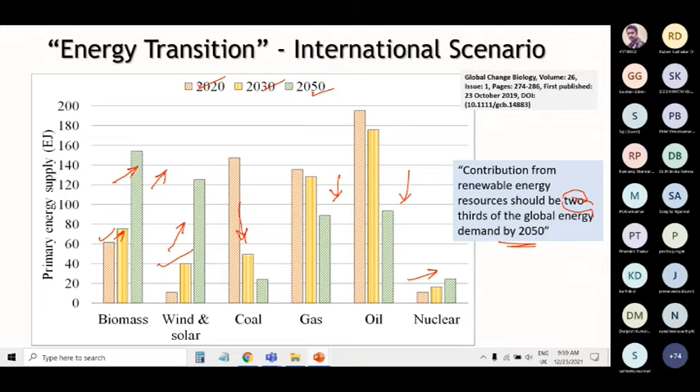Okay. Take the biomass. If you take the biomass supply chain, we need to hope for a feedstock, because the applications are different and the properties of biomasses are different. You would have seen that Dr. Lawrence has taken a very good lecture on how the characterization is done, what is the need for studying a biomass, how biomasses have different characteristics and their performance. All those things you have seen. Therefore, the feedstock supply is very essential.

And the conversion of biomass to fuel. See, the feedstock should be selected properly and the conversion system should be designed well, then only we get a biofuel. If you take biomass, normally we concentrate more on the biofuel. It may be a liquid fuel, solid fuel or gaseous fuel, whatever it may be. So biofuel has to be prepared, then it can be used for energy, any end usage, either a thermal application or power generation.

Among the biofuels, if you take the gaseous fuel, it has a lot of flexibility. You can use it for any thermal application. You can use it for any power generation without much conversion. If you want to develop some new energy-based system in a rural area, if the local biomass can be used as a gaseous fuel, the complications for the system will be reduced. If you go with the biomass directly, a lot of issues will come, operational issues, everything.

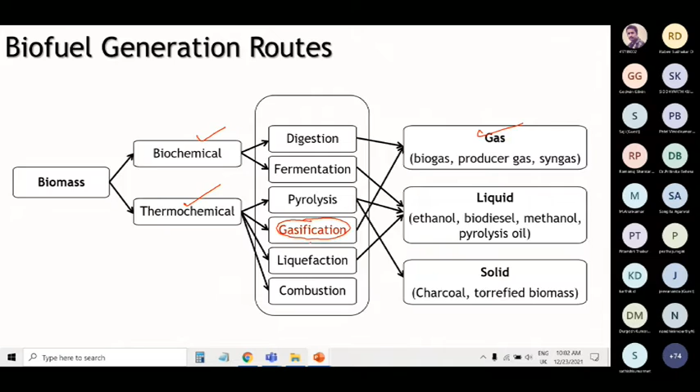You have seen many types of conversion systems. I'm not going to deal much on that. My focus is toward the gasification. If you take the gasification, some basic terms are available. Maybe most of you know what is gasification. It's a partial combustion of biomass with an oxidation medium to form combustible and non-combustible gases.

Actually, the main thing is we are heating the biomass to a particular temperature, either burning some quantity of the biomass or using external heat. We heat the biomass to a particular temperature, and we are trying to make some endothermic reactions. The gasification reactions are endothermic reactions, so those reactions need heat. So if we apply heat in the right temperature and the right quantity, we can get gases like CO, H2, CH4 and so on. So that is the main aim of this gasification.

Mainly we are using air or steam, sometimes a combination of air and steam. Many approaches are there. I'm not going to deal more on those things. Our focus is mainly towards the air. The air is available everywhere. As I said, our aim is to take this technology to the rural area. In the rural area, we cannot work with complicated things. We have to work with simple things, available things, right? That's the reason we have taken air as our gasification medium.

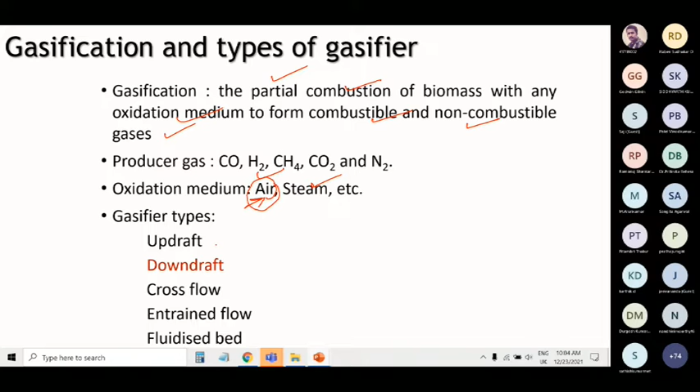If you take the gasifiers, there are different types of gasifiers available. First of all, let me say a few words, just to refresh you, about what is a gasifier. A gasifier is a chamber where we are keeping the biomass. We are drying the biomass, and we are heating it, and some pyrolysis activity is going on. The heat is supplied by this combustion. Some quantity of biomass is burned with air, and that is used for this pyrolysis, then drying.

Finally, after that, we are going for a reduction. This zone is the one which is converting the char and other things to a gaseous fuel. So this is the basic operation. We are applying temperature by a partial combustion. We are doing all the thermochemical reactions inside. Finally, we are getting a gas outlet. So this is the medium where we are giving fuel.

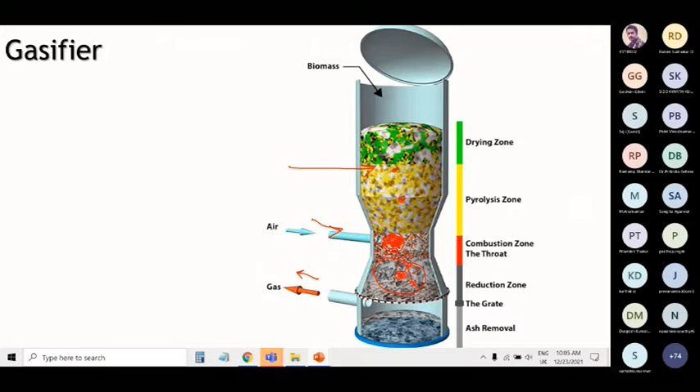Depending on the way the biomass is given to the system, or on the reduction zone, we are classifying the biomass gasifier into different types. This is an updraft gasifier; the reduction zone is normally above the combustion zone. In the downdraft gasifier, the reduction zone is below the combustion zone, and cross flow means it is at the side of the combustion zone. These things are based on the combustion zone.

Depending on the type of biomass, we have to deal in a different way to have a good flow. Our main aim is to get a good flow and allow enough time for the biomass for the thermochemical reaction, and at the same time collect the ash and get a good quality producer gas without much tar and other things. Then sometimes we are using the fluidized bed and the entrained flow. Our focus is mainly on the downdraft gasifier. As far as the Indian situation is concerned, these downdraft gasifiers are available and well suited to our requirements. That is the reason it has been selected.

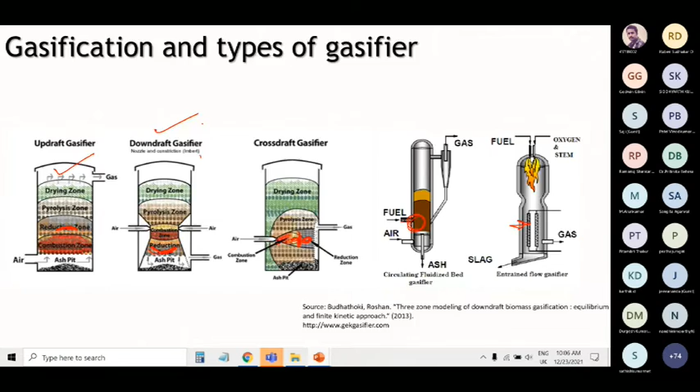So in this downdraft gasifier, as I discussed before, the biomass is fed from the top. It may be continuous or batch, we will see to that. The top zone is a drying zone, then pyrolysis, combustion and reduction. Actually, the grate is there. This is the one which is controlling the size of the biomass. If you want to use a big size or small size biomass, accordingly we have to have a different grate size.

Then first we fill it. We are burning it partially by supplying a limited quantity of air. Normally we call it the equivalence ratio. We won't send the stoichiometric air. We control the air so that the required amount of heat is produced. So this heat can support the endothermic reactions in the reduction zone, and the gas leaves.

A lot of other factors are there to control the zone temperature, control the ash and other things. Okay, that we will see in the coming slides. So this is what we are going to do.

So our gasifier, the downdraft gasifier, is a very simple device because any biomass can easily be charged or loaded in the system, and you can easily remove the ash at the bottom. We can control the air flow rate, we can control the moisture, so many things can be controlled. This is a simple device, there is no complicated operation. That's the reason a biomass gasifier is preferred for rural applications.

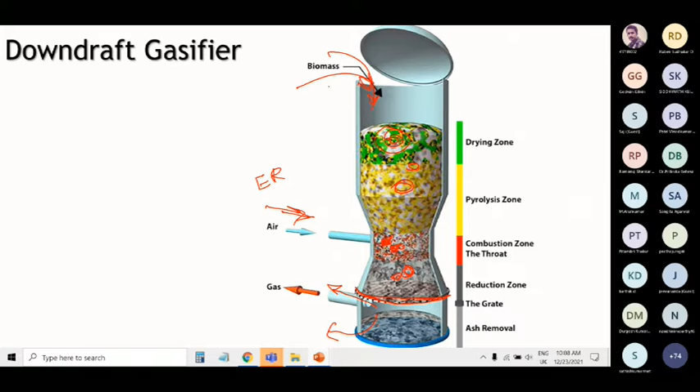Already some gasifiers are also available, and some of the features they have. I'm giving you some more basic things about the gasifier, why we have selected this type of gasifier in our research to implement the rural biomasses. The downdraft gasifier, throat type and open core type.

Actually, there is a throat section available normally in the gasifier to increase the velocity of the air if it is forced convection. We pump air into the system, and it should control the flow. For that we have a throat. If you use powdery biomasses, especially low particle size biomasses like rice husk, groundnut shell or coir pith, the throat section is the place where the flow chokes. So we cannot get a good gasification. A lot of problems are there.

That's the reason we have open core. The throat is not available. The throat is in the combustion zone, where some arrangement is there, but below the combustion zone the throat section is completely avoided. Even with the downdraft gasifier it is possible. We can change. And with the recently available gasifiers, we can go for both modes, with solid big size particles as well as small size particles, and we can work for hot gas and cold gas.

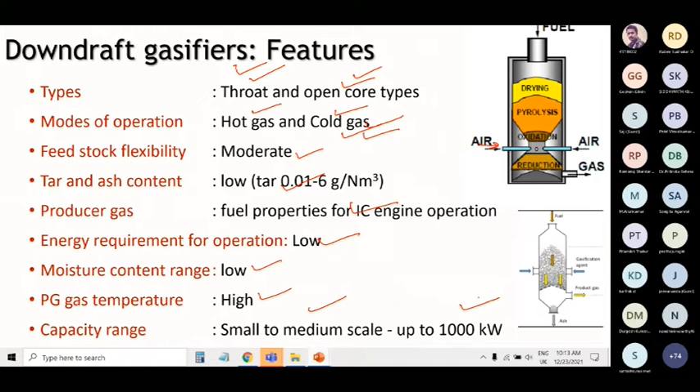Maybe 20 kilowatt thermal you can get, or 1000 kilowatt thermal we can get. It can be fabricated with good efficiency. Okay, we can fabricate the system for small power as well as large power with a good efficiency.

When we take the operation parameters, we have to control some parameters so that we can play a major role for the energy efficiency, proper gasification, overcoming the flow issues, end-use application, then quality of the gasification. Okay, so all these things are the major roles, right? For that, we have to control the input parameters. First of all, to make the system perform well, the input parameters must be controlled well.

Input parameters in the sense, the feedstock. So this is our main focus. So feedstock should be properly controlled. Many characteristics are there for the feedstock. It should match as per the design requirement of the gasifier, or we have to suitably modify the gasifier for meeting the requirement.

Then moisture. Moisture plays a major role in the performance of a downdraft gasifier, especially choking or other things, tar formation, all these things. So we should study and control it. Gasification medium, the inlet air, maybe you can say air, okay, but the temperature of the inlet air plays a major role. The humidity of the inlet air plays a major role. So all these things are to be controlled.

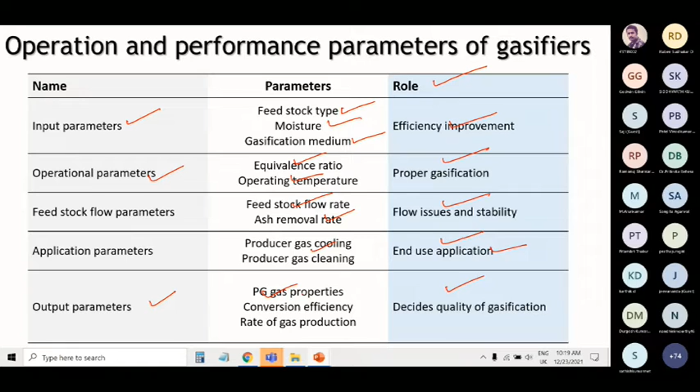For instance, we are trying to use this gasifier for paddy parboiling, where they are directly using rice husk. Instead, if you go for this gasifier, we found a lot of savings in many areas. That's why we should know the parameters and the characteristics of the feedstock well. If you know those things, we can take it to the required application and our expectation can be fulfilled.

Now I want to discuss some performance parameters and methods to improve them. We can control the feedstock properties, and we can do some modification in the design - change the position of the nozzle, change the angle of the nozzle, increase or decrease the various zone sizes, change the dimensions of the gasifier. If it is a small change with techno-economic viability, we can ask the manufacturers to do the same and get it.

And we can use catalysts - many people tried with catalysts, which has its own advantages and disadvantages. The gasification medium can be controlled, maybe using preheating. Suppose we have low temperature waste heat available, we can use it for preheating the gasification medium and control its quality. Then we can improve things. The other method is co-gasification, which means mixing of biomasses.

The main problem we face today in rural application is, suppose we design a gasifier for rice husk - it is available for one particular season, and once it is over it will not be available. The gasifier becomes idle, or it has to buy fuel from a long distance, which will not be cost effective.

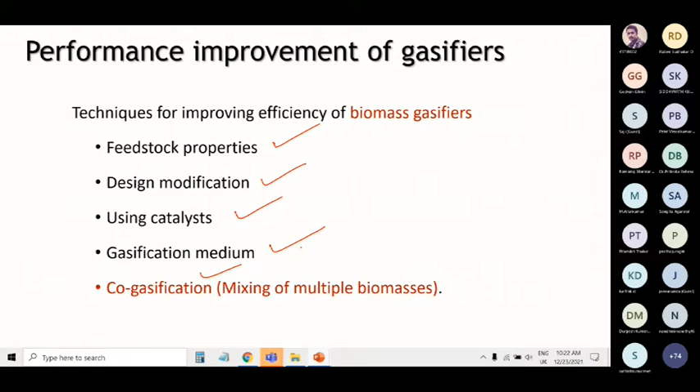The selection of feedstock is a very essential step. We have to study the availability and the properties. Availability we studied by making surveys in different regions, discussing with people, and based on the small industries available, we found the availability of different biomasses we tried. Then the properties and characterization are very important.

It has to be studied. Then only we know its carbon content, ash content, whether it is manageable - all those things we get an idea about. Then handling, how to collect. Some biomasses are expensive to collect, some have expensive transportation costs because these are all bulk density components. If you take rice husk in a big sack, it may be 10 or 15 kg. So we have to collect, store, transport - all those issues are there, and we have to study them.

Then cost. Many biomasses are available, but sometimes they may not be cost effective. All these factors are to be studied.

And on the point of characterization, I am putting a table here. It shows that some biomasses have high ash content. Sometimes previous reports say 14%, 20%, 25%, let it be. What I'd like to say is, depending on the location and the type of plant, the characterization properties will vary - the carbon content, hydrogen content, oxygen content, as well as ash content, all these vary based on the place.

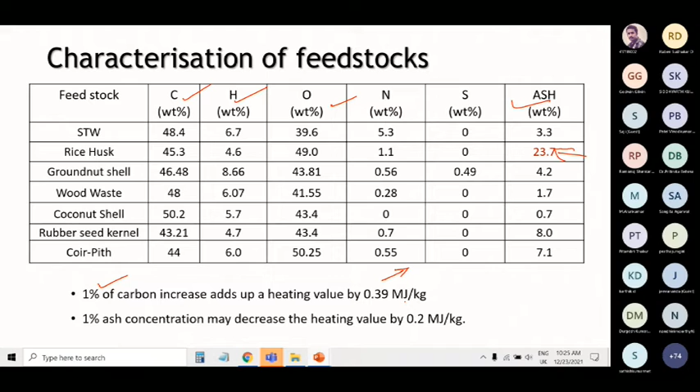A crude analysis says that if the carbon percentage is increased by 1, the heating value can increase by 0.39 megajoules per kg - this is some crude rule. So if the ash content is reduced, it's good; if the carbon content is increased, it's good. So we get some idea. Maybe detailed characterization may be taken, but for a basic application, we need the minimum study and get some output regarding the carbon content as well as ash content.

If you go for co-gasification, it means mixing of 2 or 3 biomasses. One is called primary biomass, the other is taken as secondary biomass. We are mixing them.

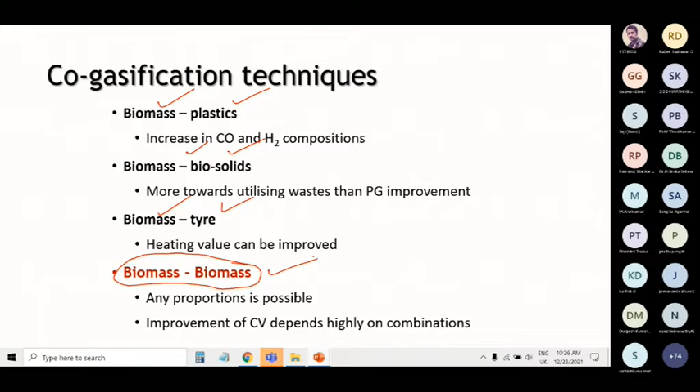If you take co-gasification, there are many techniques available. Biomass and plastics - people do it to improve the CO or H2. Biomass and biosolids - in some places, biosolids can be converted to biogas with proper mixing. Biomass and tire. But all these things may not be possible in rural areas. In rural areas, the only possible thing is biomass - we have different types of biomasses, and we can mix all of those. That is the reason these biomass combinations were selected for our studies.

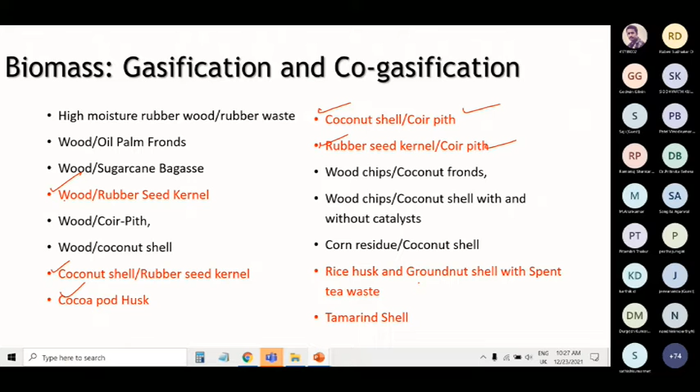If you take biomass gasification, many studies are available - people tried different combinations, different mixing ratios. But we took what is given in red here, and we tried all these in our gasifiers and checked how the mixing performed, whether it gave a good yield or not. For instance, when we tried coir pith and coconut shell, it was not attractive. Even rubber seed with coir pith was not attractive. Even though coir pith has a high calorific value as a solid fuel - good carbon content, everything - when we take it to the gasifier and mix it, it doesn't give a good result. We cannot go very deep into the technical aspects, but from a practical point of view, it was not doing well. But some bio waste, when added, gave us a very good output. That's the reason we took all those things for our studies.

These are the biomasses used. And for our experimental study, which I will explain in detail later, we used 2 gasifiers. This gasifier is a 50 kilowatt thermal gasifier, used for thermal applications. I will discuss all the details in the coming slides.

It is mainly used for thermal application. We have to load around 40 to 50 kg of biomass at a time, seal it, switch on the blower, and based on proper air supply and ignition, it starts working. Maybe after 25 minutes we get the producer gas, and it will run for 4 to 5 hours continuously.

Then we have to reload it. We have to remove it and wait maybe 24 hours to cool down. Then we should go for the next loading. It cannot be loaded continuously.

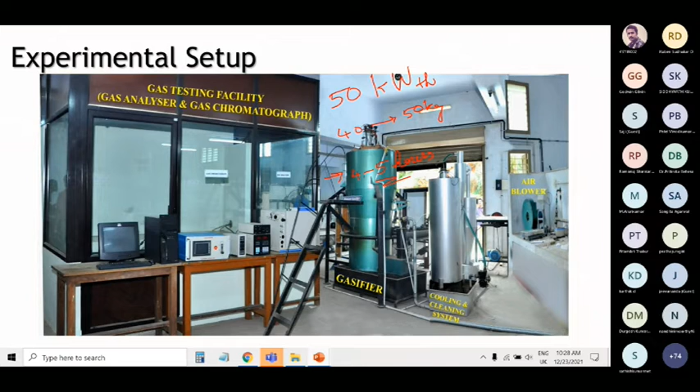It's one kind of gasifier. It is commonly available, mainly used in crematoriums. I think it is available, and some suppliers are making it there too.

Mainly it is used directly. These are the components, I will explain later. This is a sectional view of the gasifier, made just for our studies. Here the biomass is stored.

We have different sensors to measure the temperature. These are the air supply system nozzles, and the grate is here. The producer gas comes out. So this is a downdraft gasifier.

The air is passed through this way, and the combustion takes place here. We are already making a throat section here, and with the help of that it performs the gasification process.

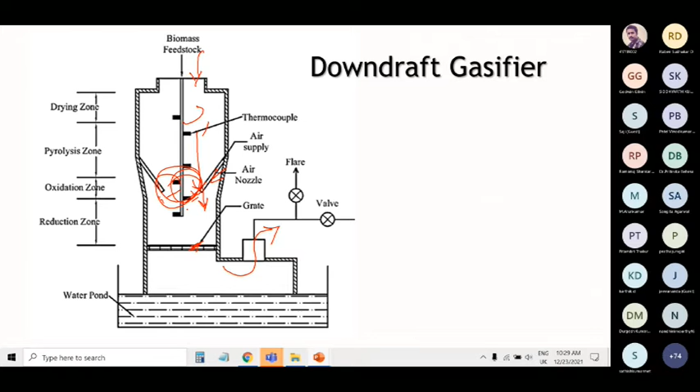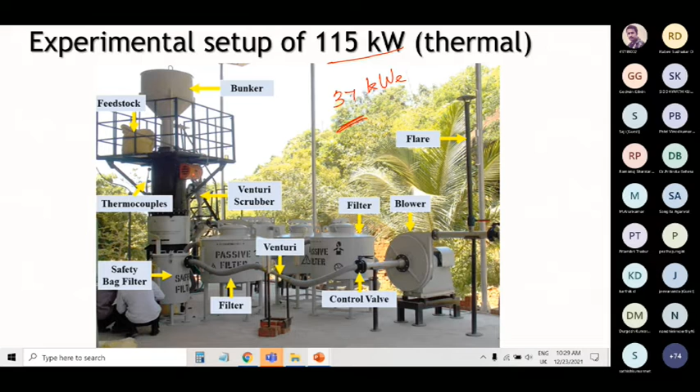This is another view of the gasifier. It can be operated continuously. It has a filtering arrangement and can work in direct thermal mode. It can be used for engines and for any applications.

We have all the control mechanisms here. We can use hot gas mode, cold gas mode, minimum filtering, maximum filtering - all these things can be done. I will discuss these more when covering the experimental studies.

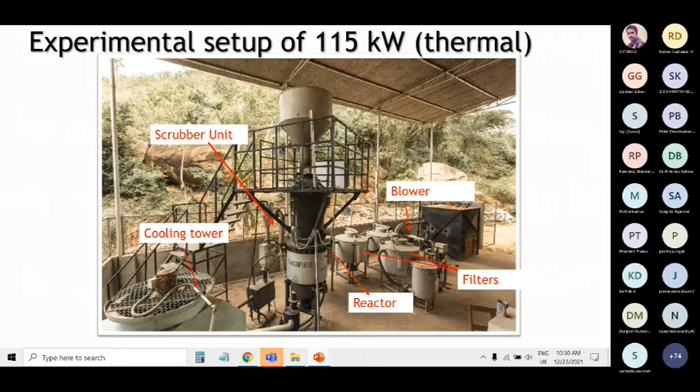As I said, to approach our research on using biomasses in different local regions, we used three types of analysis mainly. There are different techniques available - analytical methods, numerical methods, experimental methods, economic analysis, and sometimes statistical analysis.

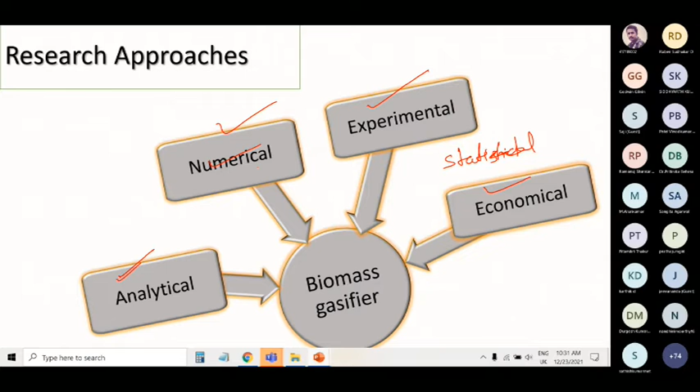For statistical analysis we can use design expert software, or a combination of experimental and theoretical studies. Different approaches are there. I'm going to talk about the analytical approach we used, the experimental numerical studies in CFD we used, and the experimentations we have done.

Analytical method is a very simple method. If you want to try with one biomass and see how it works in a gasifier, we can go for the analytical method. No need for a highly complicated computer system. If you go for numerical analysis, we need a powerful computer, proper software, and a lot of things.

But for the analytical method, we can use either MATLAB or Scilab, which is open source - we used both software packages. Only thing is we have to solve the equations. There are many methods available to solve the equations.

We should know the chemical kinetics - how the chemical reactions are going on, what reactions occur where, how it is controlled, what the kinetic parameters are, and how equilibrium conditions can be maintained. All these chemical aspects you should know.

Mainly it has two major equations: one is the global equation, one is the energy balance equation. The global equation decides the reactions, and the energy balance equation decides the temperature and energy, all those things.

You cannot merge both these things easily, but some techniques can be used to take care of both in the gasifier. What it gives is a crude output, but sometimes it can be on par with the experimental results.

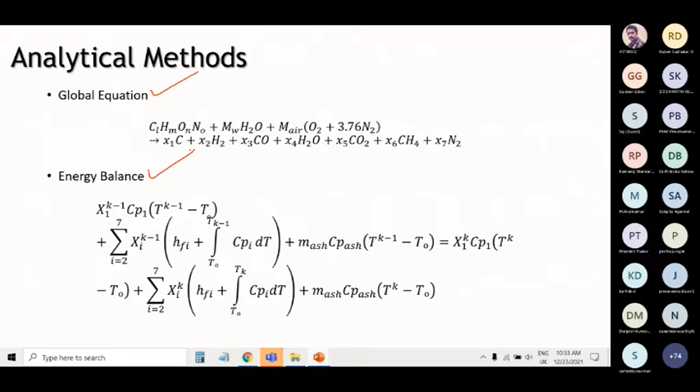For any new biomass, the characterization might already be available, or we can characterize it to get the basic properties. Once you know all the fuel properties, based on that we can create a mathematical model. This is the model we created. For creating the mathematical model, the main concept is you should assume the things properly.

Some biomasses we cannot directly use in a system - we cannot put them directly, but we should know how they behave. For that we can go for this analytical study. The domain should be first created properly, then all the conditions, everything.

So we used a two-zone approach. People used a two-zone approach, three-zone approach, single-zone approach, and this bulk approach. Different approaches are being used, but it is not a complicated one. A lot of literature is available for these analytical methods. The main thing is we have to understand the basic equations, what is happening in different places.

Even presently, we can go for iterative solutions. We can divide the zones into small segments and make control volumes there, and in the control volumes we can solve all the equations and go ahead. So this is also possible. Mainly we use the equilibrium based approach in zone 1.

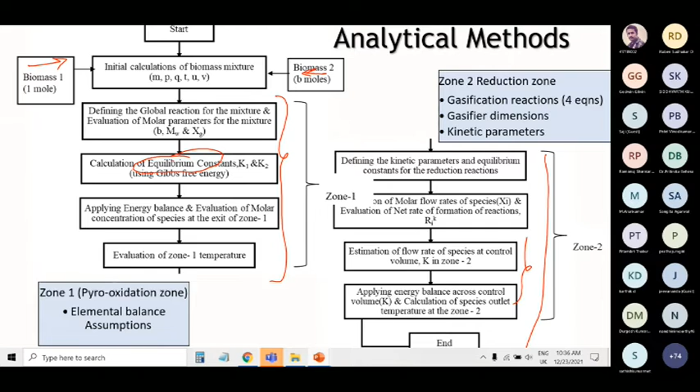First, after making the model, it should be compared. For instance, an example from our studies: we used spent tea waste. After taking the tea, we have a lot of waste. Is it possible to use that waste for gasification, in a commercial gasifier? That was our aim. Since it has a smaller particle size, if I put it in a commercial gasifier, it will go down immediately. Therefore, we studied how it performs by an analytical method.

Yes, it has high carbon. The characterization study already says it has good fuel properties. So we tried the analytical method, using all the basic equations and characterization constants. We found it gives a good result, because we compared our results with previous analytical studies, so our approach is good. This is very important: when going for an analytical method, first we have to validate our approach.

Then we can predict. So we found that spent tea waste, STW, can be a good biomass for gasification. Once we found that, we know it is very difficult to use it in an ordinary gasifier, so we should go for different methods. That's the second thing. First we established that this is a good biomass, using analytical studies.

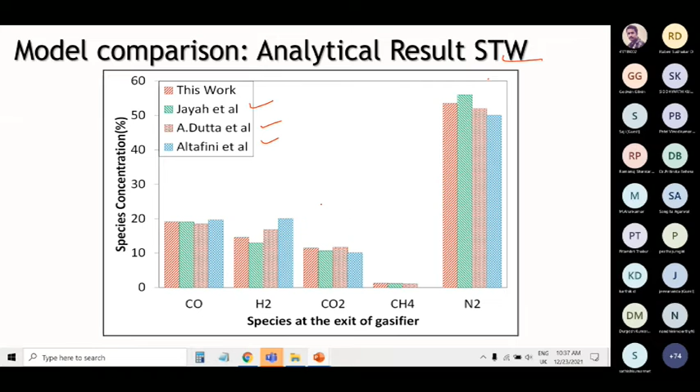Similarly, we used analytical studies for the prediction of the gases: how much CO, H2, CO2 can be produced with respect to the equivalence ratio. The equivalence ratio is usually the predominant factor in a biomass gasifier. All operations are designed for a range of equivalence ratio; the airflow vents, motor size, blower size, dimensions, pressure drop are all defined based on it.

So we cannot get any equivalence ratio in a gasifier; there is a range. If a gasifier has a particular range of equivalence ratio, we can think how it works. So we checked, assuming STW can work in this type of gasifier, and found it can produce a good amount of CO, H2, CH4, with reasonable CO2 and nitrogen and a good calorific value.

Normally the calorific value of rice husk or groundnut shell is close to 5.5. But we found that STW can give a good calorific value. So this is the prediction.

We didn't use much computer capacity. With the basic equations, we can predict how it behaves. So this is possible for any biomass if you know the characteristics of the biomass.

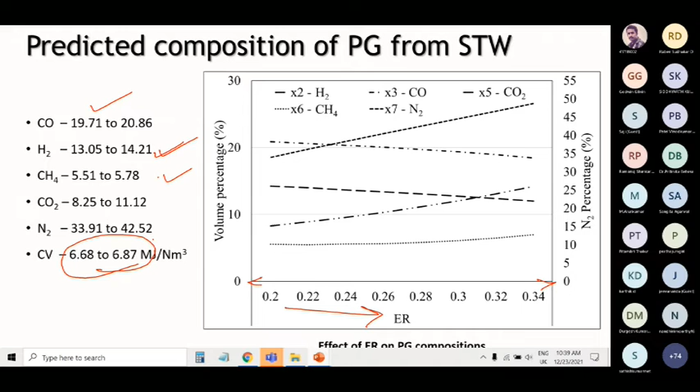Okay, if you go for experimentation, it will take a lot of time. You know about it. Numerical means it will take a lot of computer time. With the simple methods, we can test a mixture or blend. We can test a new biomass or new biomass blend. All those things are possible.

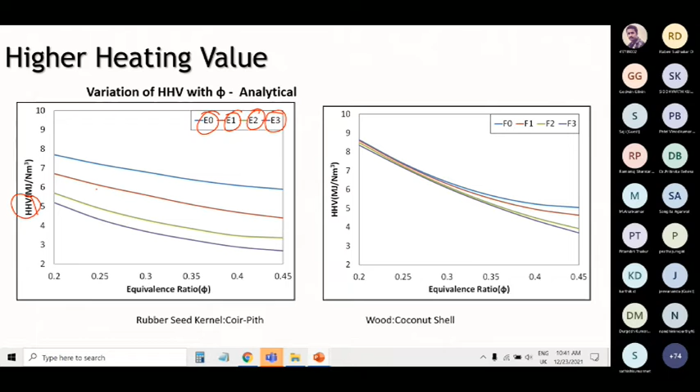For example, if you know in a place rice husk is available abundantly, but tamarind shell is only available in limited quantity, we can combine. Okay, this is 5 ton available, this is 1 ton available. Can I put 20, 80? So we can take a decision whether it is possible, and if I put it, how much efficiency I have to compromise. So all these things you can study based on these approaches.

Okay, even the gas production rate. The gasifiers are designed for a particular gas production rate. If I am reducing the gas production rate, then I cannot meet the requirement for the application. Therefore, that also should be studied. We have to study the gas production rate, and at the same time the quality of the gas.

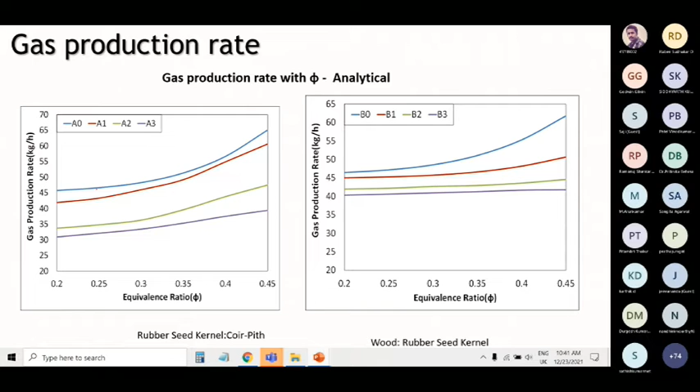When we increase the airflow, automatically the gas flow will increase. But because of the nitrogen and carbon dioxide, the quality of the gas will go down. Therefore, we have to compromise: at the best condition, how the airflow rate or the gas flow rate can be maintained. So all these basic ideas we can get from this type of analysis. Similarly, conversion efficiency we can study.

As I said, for the basic parameters for taking a decision on the performance of a gasifier, we can use this type of analysis, right? It has a lot of advantages. Almost all the advantages I discussed in the presentation, but it has its own limitation. Mainly, the design aspect cannot be incorporated.

When we go for a gasifier, it has different size, shape, internal structure, everything. It is very difficult to incorporate all these things because the flow properties are issues, temperature properties are issues, heat loss is an issue. All these issues are normally based on the design aspects, so they cannot be directly incorporated. That's one major issue.

Then the temperature distribution, internal heat transfer, those things are very difficult to model with the help of analytical modeling. Then geometry: the reactor, reaction side, all the geometry we need to specify. If geometrical parameters are there, it's very difficult to use the analytical method. Then the problems because of the mixing of biomasses, the size, the formation of clinkers, the ash control, all those things are very difficult to analyze with analytical methods.

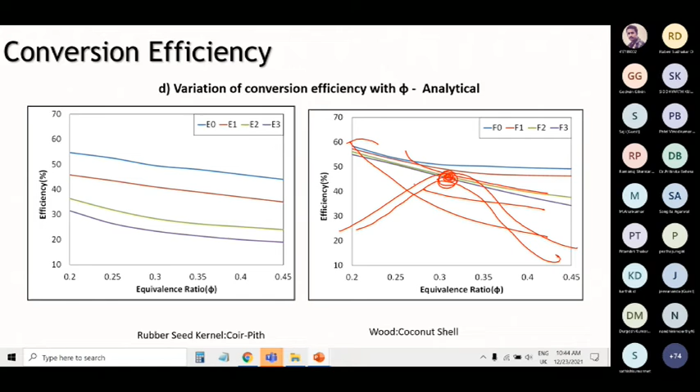But with experimentation we can fix it. So this is the main drawback. If you want to find the best equivalence ratio, it's very difficult. But if you want to know the probable range of the efficiency, all those things we can find, right? Then moisture.

So the fluctuation in moisture, it's very difficult, because when we operate the gasifier, the moisture fluctuates. With each lot we put in, the moisture will vary a little bit. Accordingly, the performance will vary. The equivalence ratio varies. The gas production rate varies.

Because we studied for 36 hours, 40 hours like that continuously. When we are charging the feedstock, we experience the variation. When I come to the experimental studies, I will show that to you. So there are a lot of limitations for this, as I said, okay.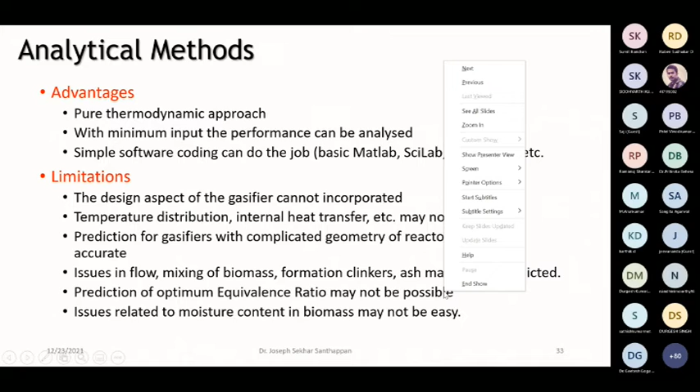Then the moisture, all these issues, some issues can be tackled with the help of numerical analysis. So we concentrated a little bit on the numerical analysis. Even with the limits of computer capacity and all those things, we tried with the numerical studies. Here I am just saying why the numerical study was taken up for our work. In this one, we can easily check the dimensional suitability. First, we checked with the analytical method. We checked whether the process will take place.

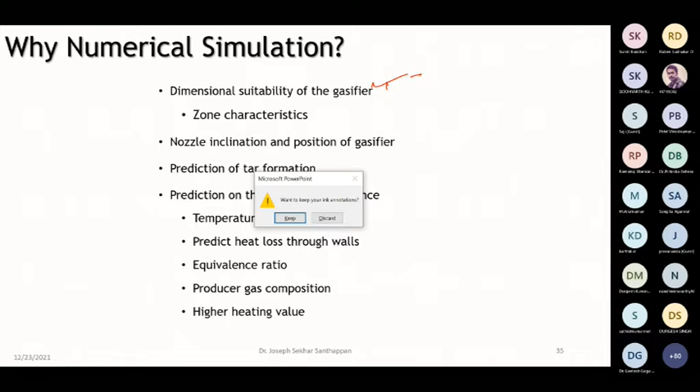Yes, anything? Anything happened? No, sir. No, sir. Please continue. No, sir, you can. Okay.

So why did we go for the numerical simulation? Actually, the numerical simulation has the advantage of incorporating the dimensional issues of the gasifier in our analysis. Okay, we can easily check the suitability of the dimension. All right, that is possible. Then the zone characteristics are possible. As I said, when we change the biomass, sometimes the nozzle position or the nozzle angle has to be changed. All those things we can study with the help of this numerical simulation.

We can even predict the tar formation, how the tar is formed. We can easily find the temperature distribution. We can understand the heat loss through the walls. We can easily verify the equivalence ratio. In the previous analytical studies it was not possible, but in the numerical study we can verify the equivalence ratio. We can very well define the producer gas composition.

The main thing is, in the numerical simulation, we take the energy balance, mass balance, the equations, the kinetics, all these things together. We make thousands or lakhs of small control volumes, meaning elements. Therefore, we can do all these types of analysis inside each and every control volume. In the previous analytical method, we used 20 or 30 control volumes with our approach.

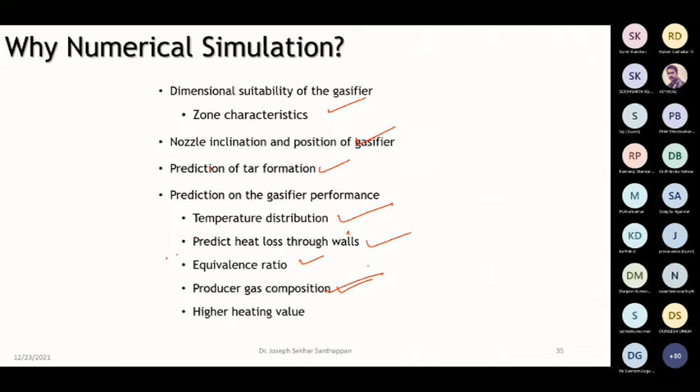Even the heating value, it's a derived one. Okay, but the producer gas composition we can get. All those things are possible. That's the reason we started working with the numerical simulation. You may know what numerical simulation is. Just for continuity of understanding, I want to mention a few steps involved in computational fluid dynamics.

Computational fluid dynamics is a finite volume approach. First, people were using the finite difference approach. Now the advanced software packages are using the finite volume approach. It is a very good approach to find the variation inside the control volumes, right?

There are many stages. The main thing is, if you want to do a numerical analysis, first we have to define the problem. We should define the domain, all those things. That is problem identification. We should take the problem towards a mathematical model. That's the main thing. Then we have to create the geometry. Then we have to create the small control volumes, or mesh. Then we should define the physics. Physics means what chemical reactions are going on, how the flow is happening, all those things we have to define.

CFD is a methodology which can help us analyze each and every control volume, and all the equations are solved by good solvers. If you define all the parameters properly, the solver can give a good solution. So therefore, the physics should be given properly. The mesh should be selected properly. The geometry should be defined well. Only then will the solution be good. Normally, commercial software will give a solution for whatever you give it.

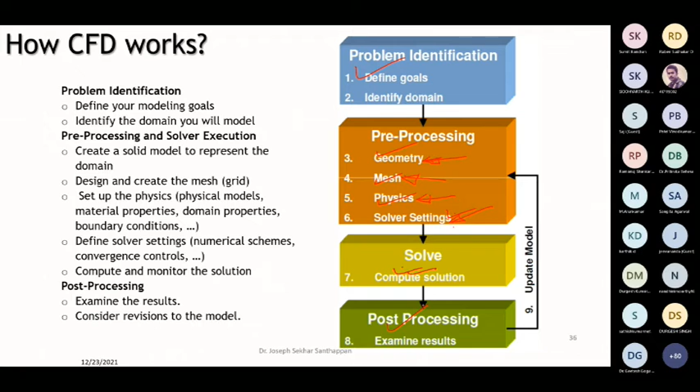I'm just giving you how we defined our problem in a software called Fluent. We used Fluent for our analysis. Initially, we used Gambit to model the system. Later, we used the ANSYS workbench. There itself, the entire model was created. Then we used many solution methods to make the solution, right?

These are the two gasifier types we used. We have to define more accurately, and we used the 2D model, okay, two-dimensional model, because if you go for 3D, we need a large computer processor, as well as in these type of gasifiers, they are having some similarity, okay. If they have a similarity, we can go for 2D analysis, that is okay.

So in the numerical studies, if something is having circumferentially a similar arrangement, we can go for this type of 2D analysis. This will help us to give a solution close to 95% plus accuracy. That's the reason we selected this two-dimensional approach. This is a gasifier, model number 1, which is 50 kilowatt thermal. This is model number 2, it is 115 kilowatt thermal.

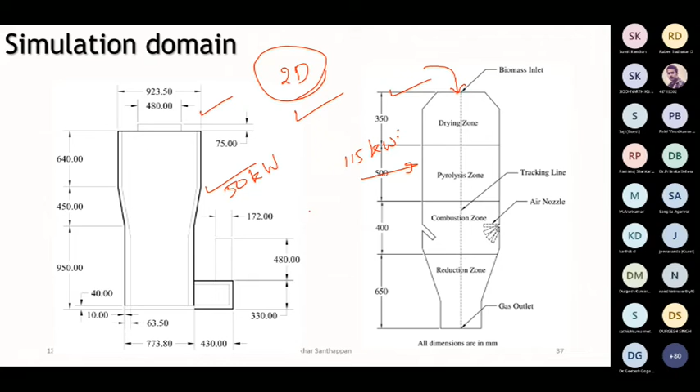This can use different types of feedstocks, either a bigger one or a smaller one, anytime. And this one can use only bigger particle size biomass. And the other difference is, in this one, we can change the position of the nozzle. Actually, when the gasifier is supplied, it has a constant position of the nozzle. We can modify. If you take the pipe, a long pipe is there, we can change the position, change the angle, all those things we can do.

So we changed those things in the practical way as well as the theoretical way, right? So we can analyze the position, everything. Accordingly, the domain was created, okay? We cannot create a domain differently and do all the analysis at the same time. Every domain we have to do a separate analysis, then we have to take the results.

Similarly, this one also. And the difference is, in this one the air is supplied here, this is forced circulation, here it is induced. We have a blower, it sucks the air. There is a difference, anyhow, I will tell you later. As far as the simulation is concerned, no need to bother about that. We used the model in ANSYS, it is a two-dimensional model.

We made the geometry in the design modeler of ANSYS, then we used the analysis in the Fluent part of ANSYS. The boundary conditions are very important. If you want to do a solution in a CFD software, we have to define the boundary properly. Some places we should give only velocity, some places we should give velocity and pressure.

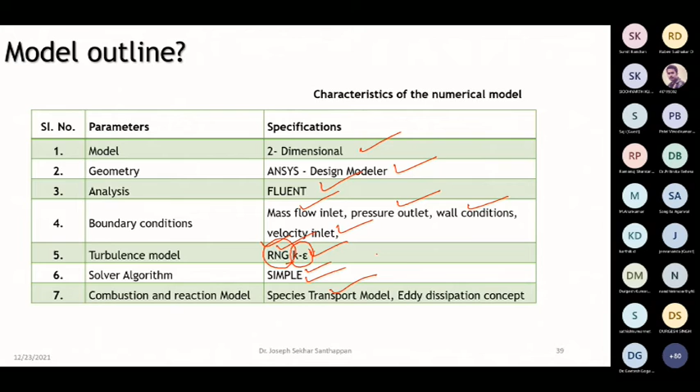And for the combustion and reaction, we should take the right model. We used the species transport model. This is the one which is more suitable to define all the species as well as their reactions. Anyway, let me show you the next slide about the reactions involved in that.

So these are the reactions. In the software, we should know all the reactions. The software will not say this reaction; we should give all the reactions. That's the advantage: any reaction you feel, we can give. The potential of the reaction is defined by the pre-exponential factor and activation energy. It will show how the reaction will happen.

Once we give all those things, the software will create something like a probability distribution function, and it will decide which will happen more and which will happen less. So all these things are decided based on these. We can define the equation and their kinetics with the help of these constants and other things. Many components are available. If you define all those things, any biomass can be defined well in the software.

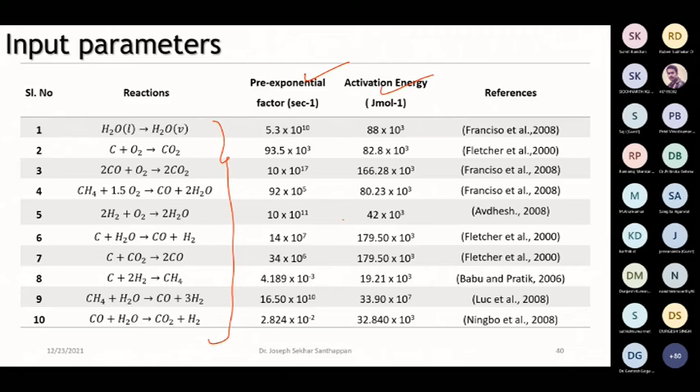This is the general simulation we used. First, we have to create the geometry, as I said, just for refreshing the whole thing. Then we have to select the species transport model. There is a model with some constants; we have to revise them and we can define exactly. Then we have to define all the species and all the boundary conditions.

Then we have to go for the turbulence model, and we used the RNG k-epsilon model. Sometimes we can define a porous media to define the pressure drop. So all these things we have to define. Then we have to go for the run.

When we go for the run, the major problem we face is stability, or we don't know whether our solution is good, whether our discretization of the domain is good, whether the domain is taking care of all the flow properties. For instance, if in some places there is twisting of flow, we know the twisting may happen over 1 centimeter or 1 mm or 2 mm. So our element size should be less than that. Only then can it incorporate the twisting or changes. Otherwise, it will not take care of those things. So we should define the element size exactly.

So how to define it? Normally people do all those things but won't do the checking. One important check is the grid independency check. There are two types of errors in CFD: round-off error and truncation error. Depending on the number of elements, the round-off error and truncation error will change. So we have to balance them. If the two errors are balanced, then you can get a good solution.

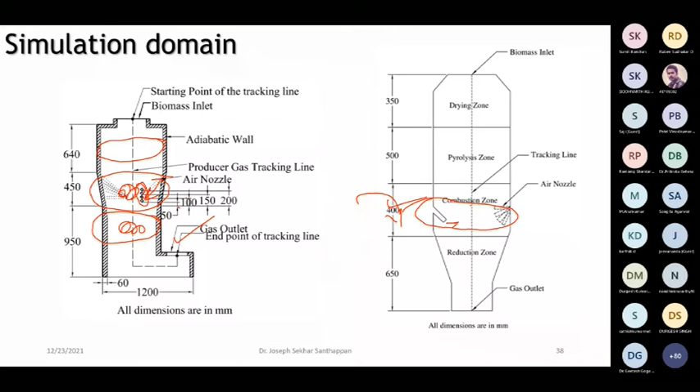Then the second thing is, people now say that any type of element the software can take, but if you can manage uniformity in the element—uniform in shape, everything—then you can get some good results. That is also an important factor. Sometimes we do all this modeling but may not get a good result; this is because of the uniformity in the mesh, which you have to adapt. Once that is over, we can say our solution is good.

Then a lot of converging factors and relaxation factors are available. All these are defined based on previous studies and experiences—similar studies where people say this type of control is good. If you go deep and read the ANSYS manual, you can find the reason we put 0.5 as a relaxation factor, or what is the good relaxation factor if the turbulence model is this. All these things you can get from the literature, and if you apply them, you can get the solution.

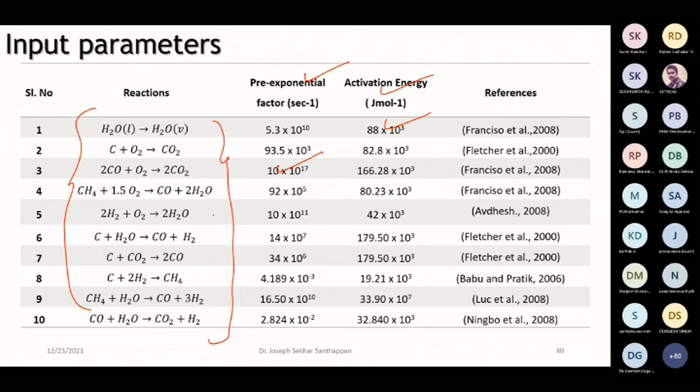So once you get a solution, now we can change any part. The angle can be changed—this is for the nozzle inclination. If you want to change the nozzle position, or change the biomass properties, we can change it. Once you go for a standard property, the only thing is, as I said, these values will change: the activation energy may change, the pre-exponential factor may change, additional equations may come. If you are mixing different types of biomasses, sometimes we experience different reactions, so those things can be incorporated, and then we can predict the properties.

Actually, the CFD process—creating the model, defining the physics, solving—is tough. Once we finish and find the results okay for a particular domain, because the domain is very important for getting a solution. The solution depends on the size of the element, the skewness of the element, the independency of the element—all these things are very important. So once we get a solution for a particular domain, then we can change any property, and it may not deviate much from the actual values.

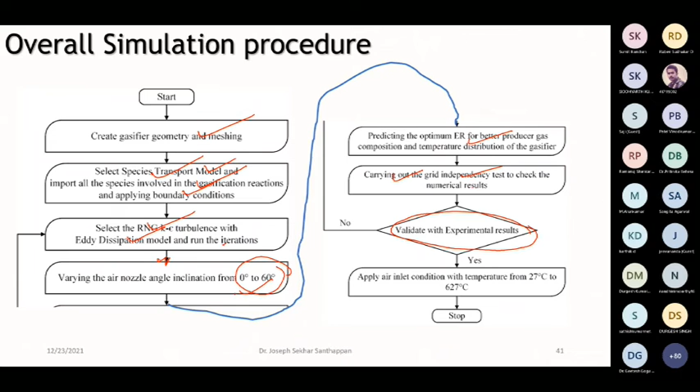Once all this is over, we have to validate with experiments. At the end of the day, if it is not validated with experiments, we know it's difficult, but for initial decision making we can use these analyses. So first we can go for analytical studies; if we find it is good, then in the second stage we can go for numerical analysis, where we can get more accurate results.

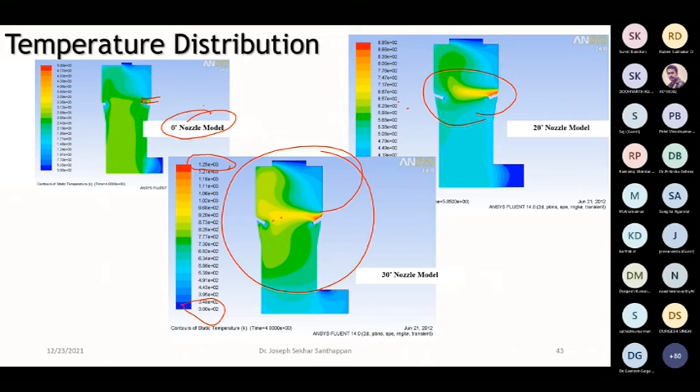Temperature is very essential to control the entire operation. If temperature is very high, it will create formation of clinkers, and sometimes it will spoil the refractory material. If hot zones come up, the refractory material will fuse, the wall will get affected, or cracks will form. Therefore we have to take care of temperature distribution - this is one important thing.

If you go for 3D, it will be more accurate, because in 2D we are assuming the circumference is similar. But with the 3D approach you can find more accurate results, though you need a larger computer space, and the flow domain definition, model definition, solver definition - everything will change. Don't think that in a 3D model we have to use the same methodology - it may not work, we have to define accordingly. But the basic definition is the same - the equation definition, kinetic energy, all these parts remain the same. But solution controls and other solution models will change. Still, you can get a better solution and predict well.

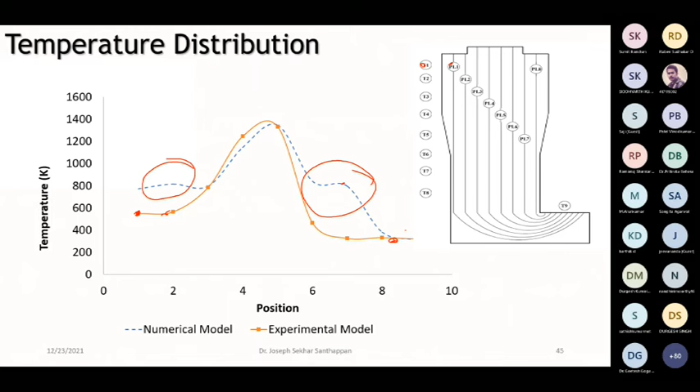So we found it almost matching, though some refinement is needed - at all these places it is not matching well, so some refinement might be needed. We took only the average. There may be some refinement needed, but still it is holding good, because at the starting point and the end point we are getting good results. This shows that the numerical approach, if done well, can help us find how exactly the system will work.

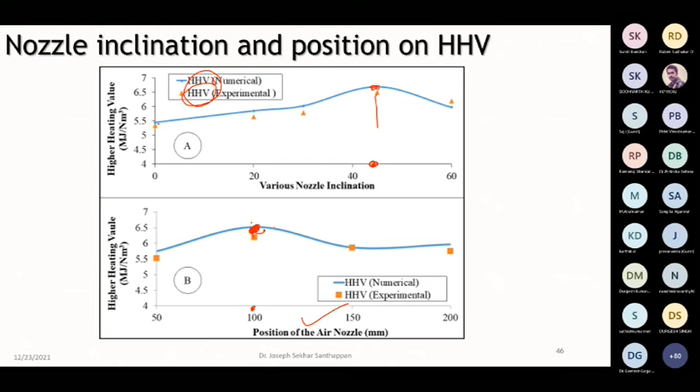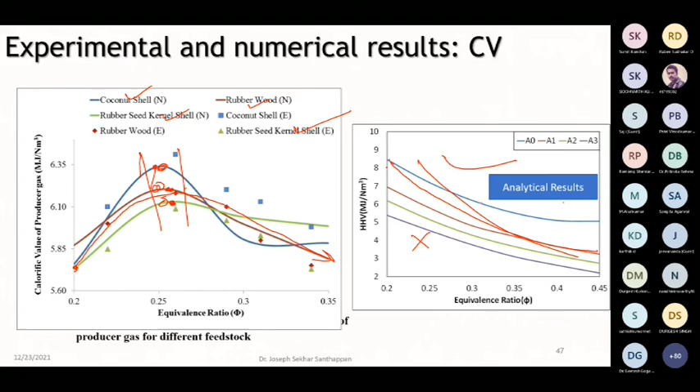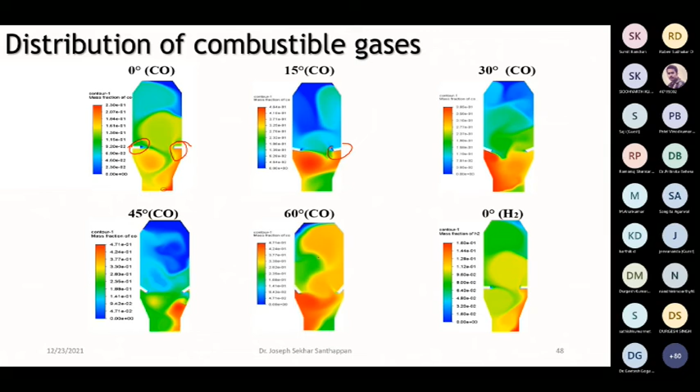So for any gasifier, if you want to use it for a particular application, for a particular biomass, we can easily predict with the help of the numerical studies.

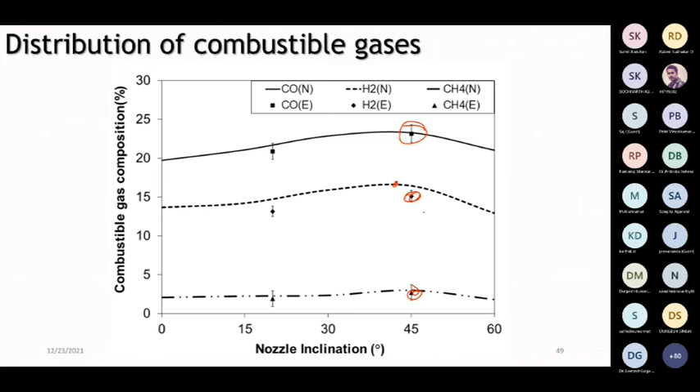We also checked with the experimental analysis. Some nozzle positions only we are able to change, and we found that the deviation is not much. In all the places in the experiment also we found some degree it is good, and numerically also this is good. Some values are very close. So it shows that the numerical predictions are almost close to the experimental observations for a particular type of gasifier. This is the combustible gas composition.

All those things we studied and found good, but it has its own limitations. It takes more time for modeling and analysis, with a lot of trial runs. We need large computer capacity, and transient simulation is also difficult. But if you want to go for a rural application, we cannot invest huge money for those things, so such things have a restriction.

And the flow issues - again, the major issue in the biomass gasifier is the flow issue. When the moisture goes up or down, the flow will change. The gasifiers are designed for a particular condition or a range of conditions, so when we change it, there is a lot of variation, but that cannot be predicted well with the help of this numerical analysis.

Mixing issues - when we go for a bigger size particle and smaller particle, as I said, I want to have wood chips, I have rice husk, can I mix it? How does it work? We cannot. But numerically it will work somehow, though practically it may not work. Some biomasses can mix, but that type of thing we cannot predict numerically.

And the same thing with clinkers. Clinker means it is a kind of carbon, a melting of ash. The ash melts and may form solids, and it's very difficult to remove. The major issues we face in gasifier operation, we faced problems also because of these clinkers.

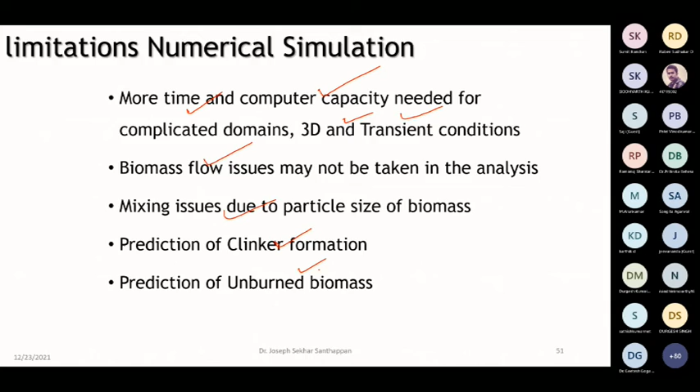We also cannot predict the unburned biomass, what happens to that. When we do the ash cleaning, sometimes we can see a lot of carbon, charcoal, small parts of charcoal coming out. That cannot be predicted. All these things need an experimental study, and that's the reason we took the experimental study.

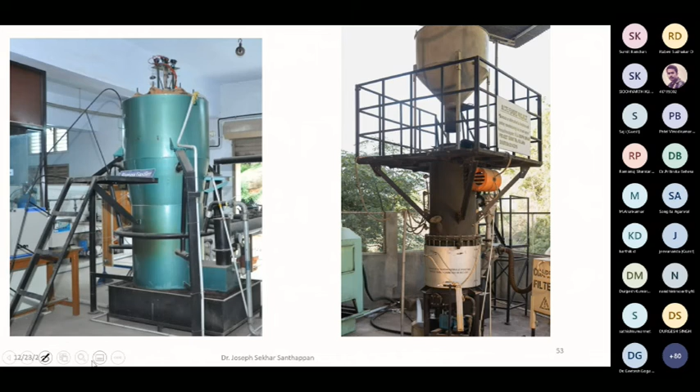The experimental study used 2 gasifiers. As I said, this is one gasifier. If you look at it, it has a top - we modified the gasifier, this area we modified to put all the thermocouples inside. We had a special tubing arrangement because our inside temperature goes around 900 to 1000 degrees centigrade, so the probe should not melt.

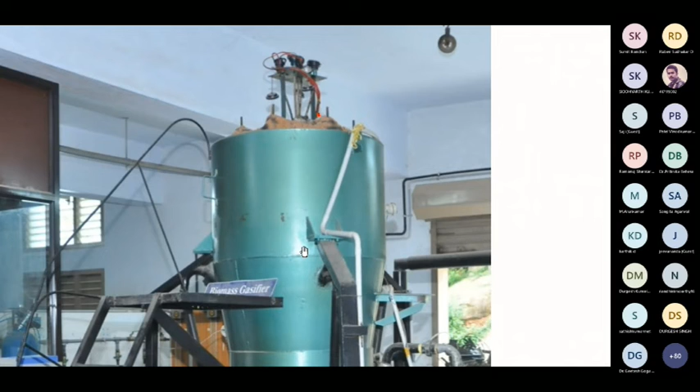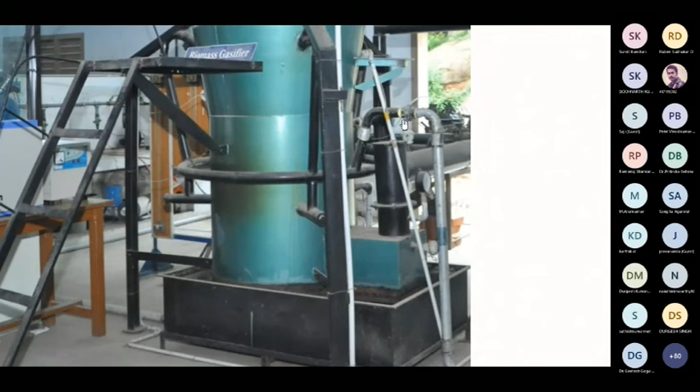So we use separate refractory coated probes to keep in different places. First we have to upload, load the things - 50 kg or 60 kg we have to load here. Then these are the places we can see - this blower is just sending air, and we have to ignite through this, and here is the bottom. This is only used for batch processing. This gasifier is mainly used in crematoriums, for crematorium grounds.

And here there is a tank. It is for thermal application, so not much cleaning is needed. Directly from the biomass, the producer gas comes out. All the ash is collected in this tray. This tray collects all the ash. Then the producer gas comes out.

It has some tar. Since it is a high temperature application, the tar will go along with the gas, because tar will sediment when the temperature goes down. If you want to reduce the temperature of the gas, definitely we should clean it. Otherwise, you can use it directly, because at high temperature the tar is in the volatile form, so it will go along with the gas and burn in the burner itself.

We cannot use the jet burners. We have to use open burners. The burner is different. If you go for other types of industrial burners, it is not possible. Since it is for open firing, brick firing or kiln firing, it can be used because it is direct firing.

In between there is no bottleneck. If a bottleneck is there, immediately there will be choking, because we tried to install some measuring instruments in that flow area. After a couple of operations, we found the entire area was choked, because the probe we inserted created a hindrance to the flow. Because of that, the tar formation happened. Therefore, there are some operational issues. So we should fix the measuring instruments accordingly.

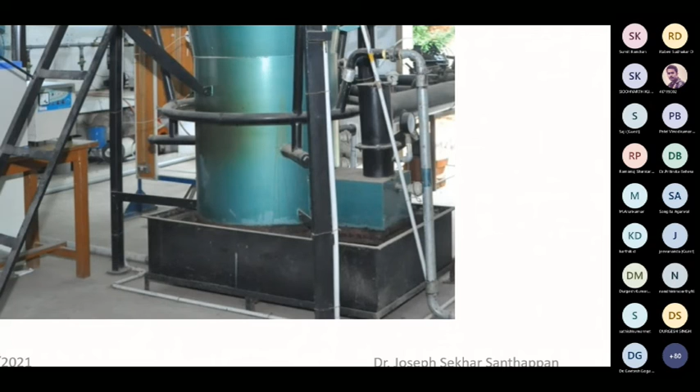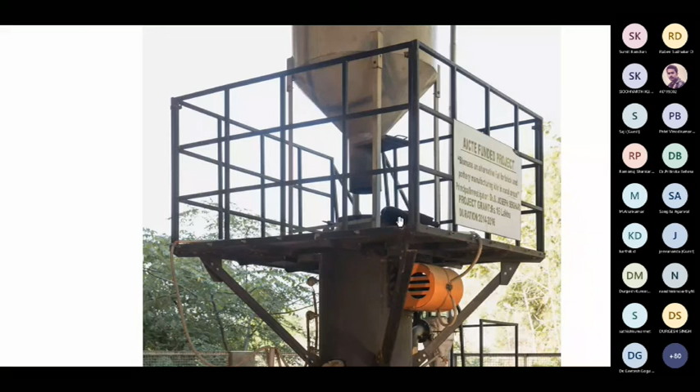Then we use the cooling. Only after that we measured many parameters, right? This is the one. This gasifier we used is a bigger one, as I said. Here the hopper is available. We can put the biomass inside, and this is the pyrolysis zone, the combustion zone.

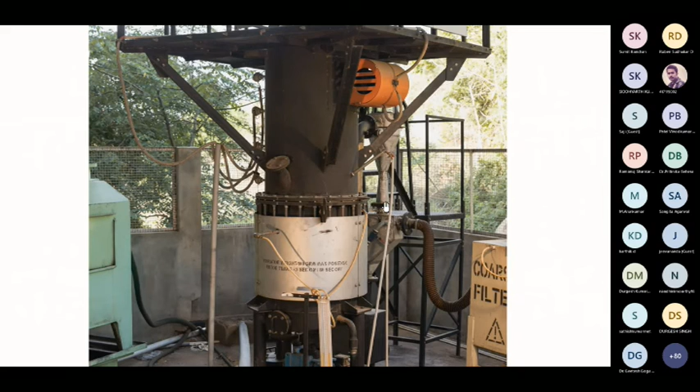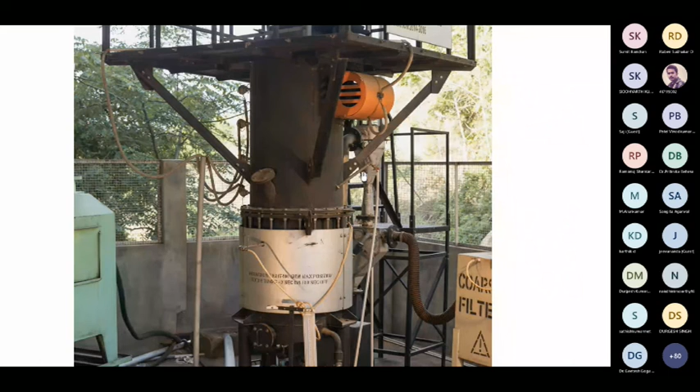This has a lot of arrangements. We can take the hot gas directly. It has a scrubber unit to clean the gas. The scrubber unit, then a lot of filters, chimney, everything is available. This motor: since we are using rice husk or groundnut shell, we have to shake it frequently to maintain the flow. Otherwise, the flow will be choked. So we are using this vibrator.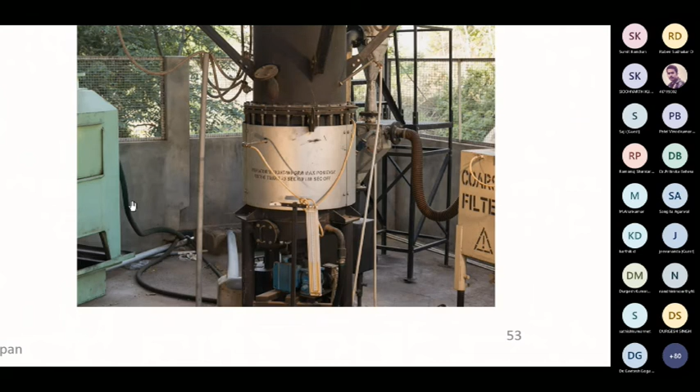Same way, we have to clean the ash frequently, so we have a cleaning mechanism. Since we have the cleaning mechanism, we should have a cooling tower to control the temperature of the water. Okay. So these are the two things we used.

So we have to control so many experimental issues, right? The bulk density created problems, moisture control, equivalence ratio, the particle size, homogeneous mixing of biomass, the temperature control, control of clinker formation, handling ash, gas cleaning measurements. All these parameters are the controlling factors in the experimental analysis.

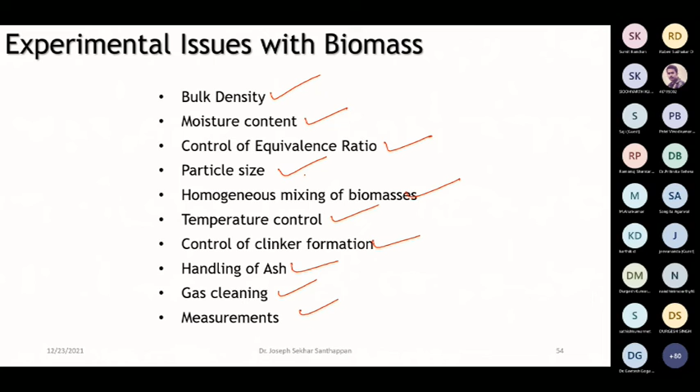Okay, so I am not going to explain all those things because I have a couple of minutes to finish my talk. This is one experimental setup, which has a capacity of 50 kilowatt thermal. Mainly we used a gas analyzer and a gas chromatograph. Yes, we used two things. Sometimes the gas analyzer may give a wrong value, maybe due to calibration issues, so we used the gas chromatograph for cross verification. We used both to measure everything.

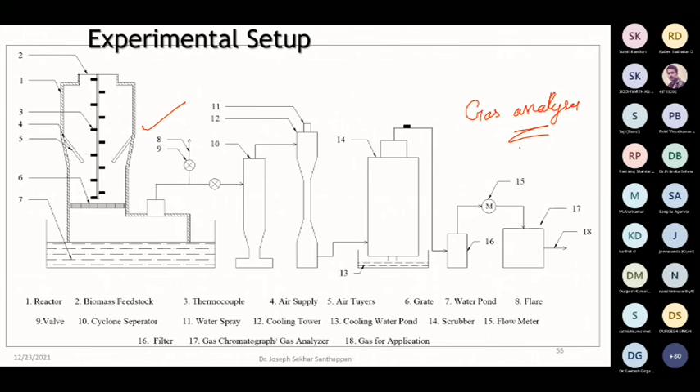And this is the setup for the bigger gasifier. Here we used many temperature sensors, and in all the places we put a lot of measurements, gas analyzer. Yes, we used this for different applications. One application was the kilns. Our area has a lot of pottery kilns and clay brick kilns, so our aim is to use this for the kilns. Sometimes we used it directly, and for the analysis purpose we used all the filters, otherwise all our instruments would be choked up.

And we have to use the nozzles, burners. We started with direct firing. Because of the choking in the burners, we used the clean gas, and we tried to find out how far it is economically viable. Then we used it in IC engines. Then it was used for paddy parboiling. So in all these applications the gas was tried, to see whether the producer gas quality is enough.

We used different local biomasses, different mixtures, to see how the system performs and how much quality we maintain in the application. With some biomasses, the brick quality was not good. Especially when we used coconut shell, the quality was very good. But when we used rice husk, the brick quality was not good, maybe due to the calorific value. But in the case of engine application, there was not much difference, because it was balanced, and from the efficiency point of view it was okay. So we used all these setups.

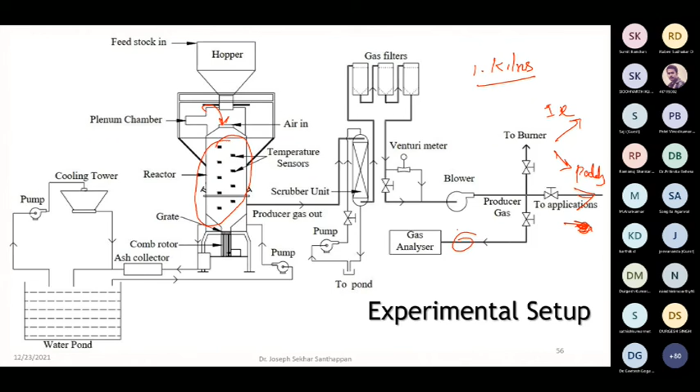And because of that, we were able to identify the higher heating value. You see, higher heating value is not the same for all biogases, all producer gases. It depends on the feedstock: this is coconut shell, rubber seed kernel shell, rubber waste, rice husk. When we use different material, we can see the higher heating value changes. Therefore, the higher heating value will change based on your biomass. You should study that experimentally to prove it. You can get something from numerical and analytical studies, but experimental studies give a more accurate value.

And it is not stable. You see, this graph shows the higher heating value for a particular application. We worked the gasifier for 36 hours continuously. In between, see how much it is fluctuating. All these things are happening because of the biomass loading, the quality of biomass, its moisture content, and the flow issues. Whenever an issue happens, immediately we have to switch on the comb rotor, or we have to switch on the vibrator, something we have to do. So all these things will happen. So we have taken only the average values.

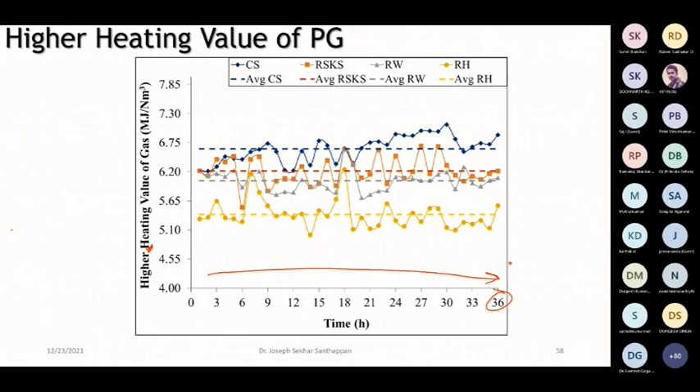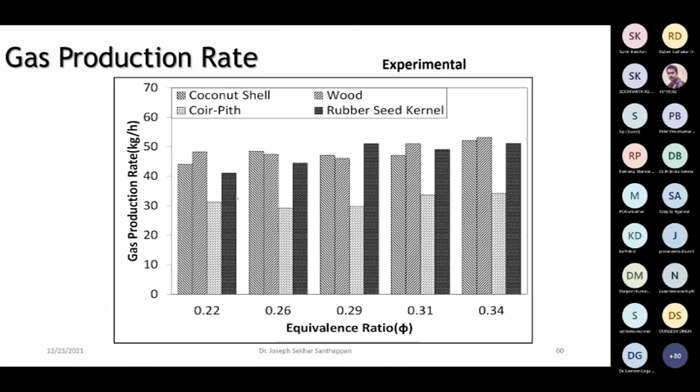Similarly, equivalence ratio. You cannot say the equivalence ratio is the same, but it is in the range. We checked it, it is in the range. So we can say, okay, this is the average equivalence ratio, and we can get a good result. And the gas production rate is also important. When we put in a new biomass, we should not disturb the gas production rate. If it is reduced, naturally the techno-economic viability will go down. We cannot get the required quantity for our application, because our gasifier can produce 80 normal meter cube per hour, and it has to operate at least at 50 or 60 normal meter cube per hour. Only then can it give the required efficiency and techno-economic value. All these things we can check with this type of experimental analysis.

And as I said in the beginning, when we use STW, spent tea waste, it can enhance the performance. So we checked. The numerical study says that it is good. The analytical study says that it is good. But we don't know whether we can mix it or not. So we took rice husk and groundnut shell, and mixed them with this tea waste. It has a lot of moisture. The advantage is when we mix this bio waste, it can easily stick with the biomass. When you mix it with water, it can easily stick with the groundnut shell, and it showed an enhancement in the efficiency.

This table shows that. The first one, here we used rice husk alone. Here this is groundnut shell. Where we mixed around 30 to 40% of this spent waste, we can see around 16% improvement in the calorific value and 14% improvement in cold gas efficiency for rice husk. For groundnut shell, it was around 10% improvement in almost all the values. So this shows that within the available limit, when we add some quantity of this powdery biomass, there is a possibility to enhance the gasification potential.

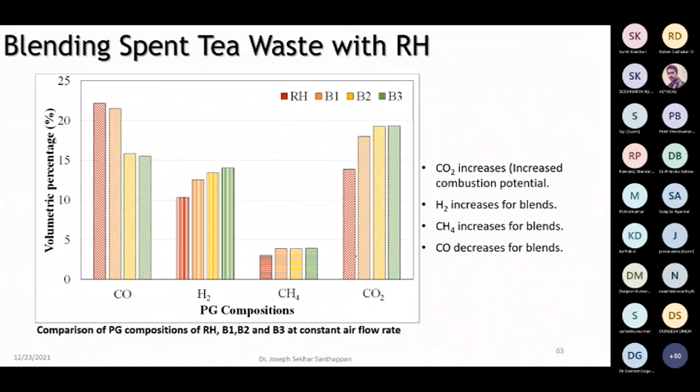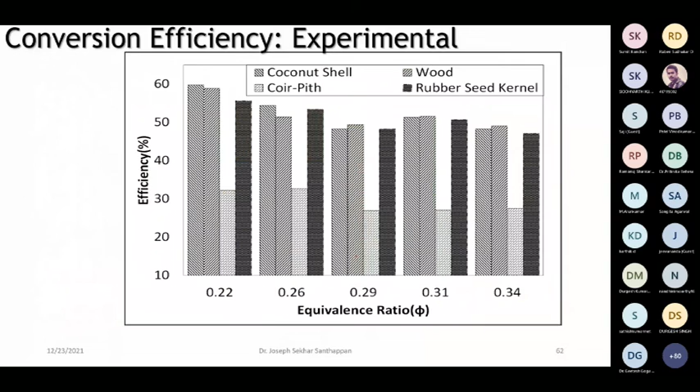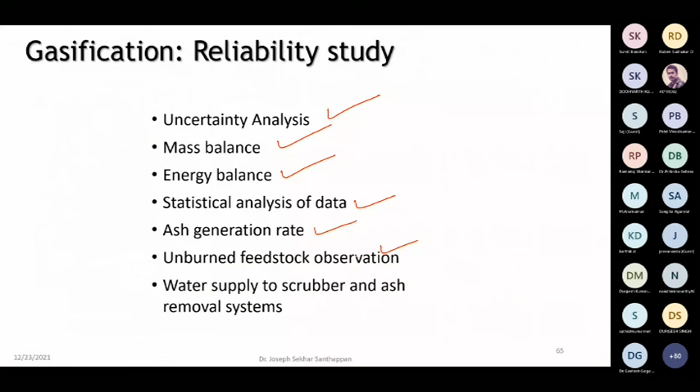Even we increased the temperature of the inlet here. I will show you a picture. We tried the inlet air temperature. When we increased the temperature, to some extent it was doing well. After that, it was not good. That also we checked, but we didn't do the energy balance, because if you give energy for the preheating, it may not work well. The energy totally is not worthy. So if we have waste heat, we can use it.

So based on that, we arrived at so many conclusions. Each paper has different conclusions. I'm not going to elaborate all those things here. If you go through our publications, you can see all the conclusions for different aspects. Generally, you can say that downdraft gasifiers are suitable to work with the biomasses available in agricultural areas, especially what we checked. It can work very well, but with some strategies we have to maintain. And we are able to establish a good numerical model to predict the suitability of the dimensions. Co-gasification is the best one, which is suitable for implementing the biomass gasifier in widespread rural applications.

Of course, the government of India or any government is going to give a lot of industries and other things to the rural areas. They are planning for decentralized power generation. In all these places, if you use the biomasses in the local area with the help of this downdraft gasifier, you can make electricity or you can go for thermal applications. Definitely techno-economic and other studies are needed, and a proper regional-wise survey is needed, because the selection of biomass is different for different regions, and the techno-economic value is also not the same.

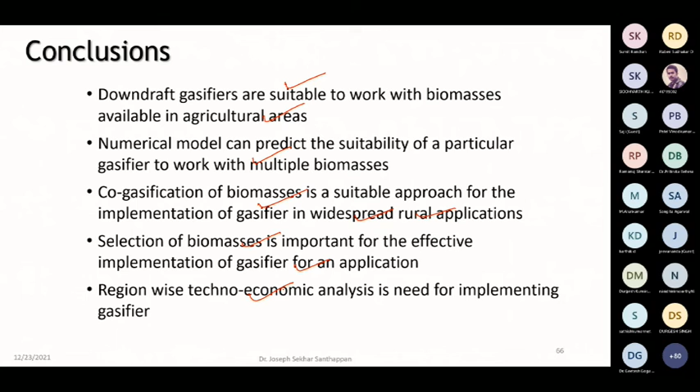But if you go for this biomass based thing, definitely the rural application can be tackled with the help of the biomasses available there. Meantime, we can contribute towards the energy transition expected by 2050. So a lot of opportunities are there. People should start working on that. Then definitely we can come out with good outcomes, and it will be useful for the entire humanity. We are now bothering about the magic value of 1.5 degrees centigrade global warming. So we can work towards that and give our contribution to protect our environment.

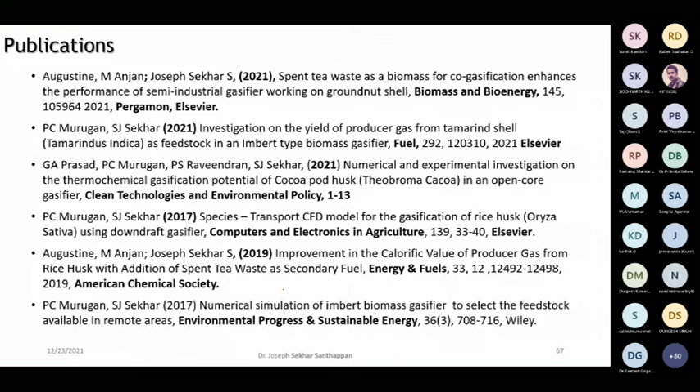These are our publications. A few publications I have given. You can also go through them. If you go to my Google Scholar page, you can see all the publications. You can take it from there. If you need anything, you can collect it from us, no problem. And you can study more and you can do well.